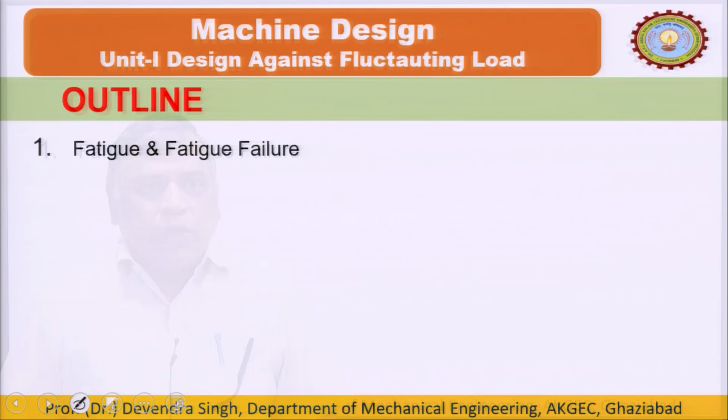I am Professor Devendra Singh, taking this course on machine design, and till now we have covered the design against static load, and this is our design against dynamic load part 2. We have discussed the various types of fluctuating stresses and fatigue failure. This lecture will include fatigue and fatigue failure, then we will discuss the S-N diagram and endurance limit, modifying factors to endurance limit, infinite life problem, finite life problem, Soderberg criteria, Goodman criteria, and so on.

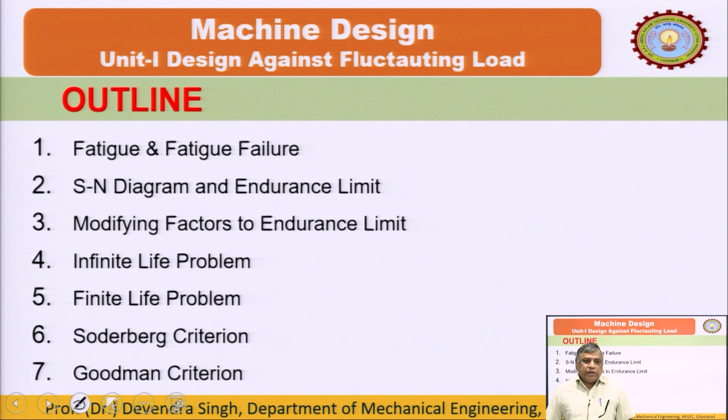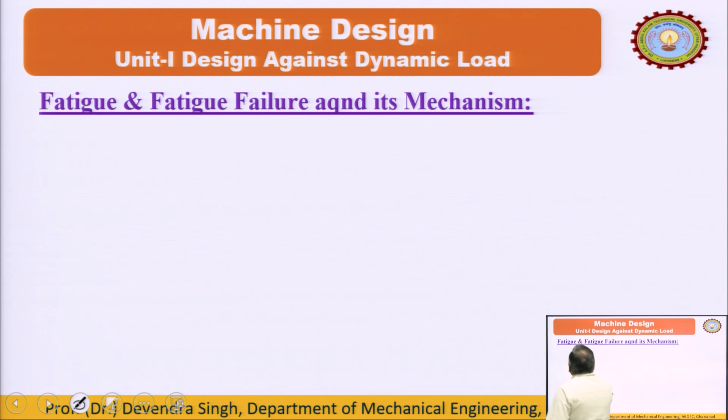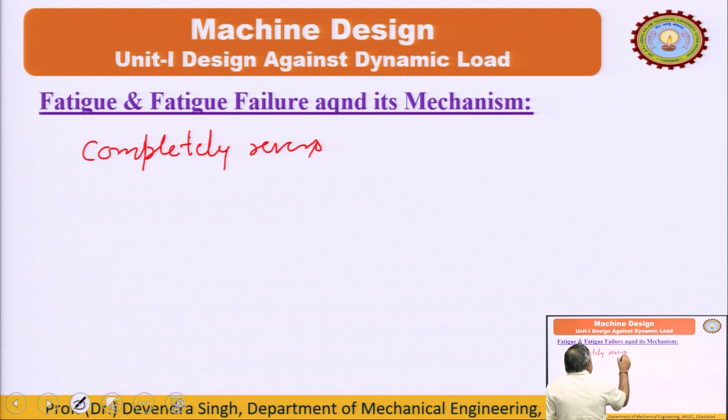So, recap our last lecture: fatigue and fatigue failure. Fatigue is the incapability of a material to take further load. If a material does not have the capacity to take further load, it is said that the material is under fatigue. And fatigue failure: if a material is subjected to fluctuating stresses, the material fails even below the ultimate tensile strength. If the material is subjected to completely reversible stresses, as we discussed in the last lecture, then in more than 90% of cases, failure takes place below the yield point. So this is fatigue failure, and it is a most critical situation in mechanical engineering, as most systems involve motion and force.

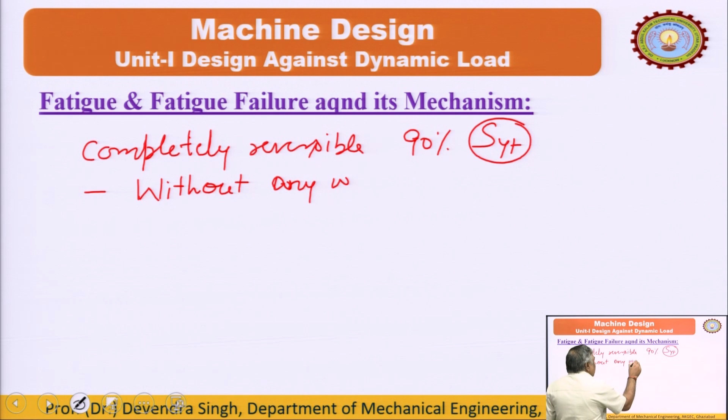So fatigue failure may take place, and the characteristic of fatigue failure is that it takes place without any warning. This makes it very dangerous. It comes without any warning, and it will result in a physical fracture. That is fatigue failure - this is the characteristic.

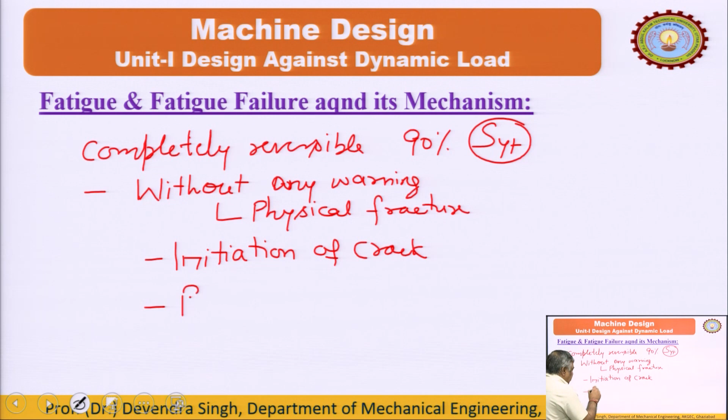As far as the mechanism is concerned, fatigue failure takes place in two steps. First is the initiation of a crack, and the second stage is the propagation of the crack.

As we all know, stress is F upon A. If area reduces, then the stress increases. So if there is any crack, the effective area which offers resistance against the externally applied load - if there is a crack, the effective area in our material that offers resistance, the value of that area will go down, while the load, which is our application requirement, will remain the same. If A goes down, then the value of this fraction, that is stress, will go up. And if this crack propagates further, this area will continuously go down and the effect will be continuously increasing in this stress, and somewhere this stress exceeds the strength of the material.

And it may take place inside the material, and this crack may be a scratch caused by machining. It may be on the surface, it may be material defects, and in discontinuities, where this crack will be considered as the initiation point, and further it will be propagated.

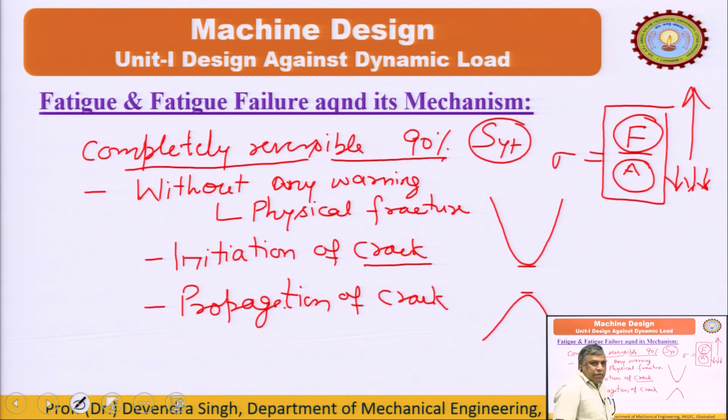A very good example I gave in the last lecture: if we bend a wire equally in two opposite directions without any equipment, without any scissor or chisel, we can break the wire into pieces. I gave this example last lecture. Completely reversible stress was applied - I turned the wire one way, then turned it the other way. So if I look at the lower-most fiber and the upper-most fiber and analyze both, in the first case the upper fiber is in compression, in the second case this inner fiber comes up and is in tension. This is completely reversible stress if the angle of bend is the same. So without any heating, without any chisel, without any equipment, you will find that after a few bends it will break into pieces. This is fatigue failure.

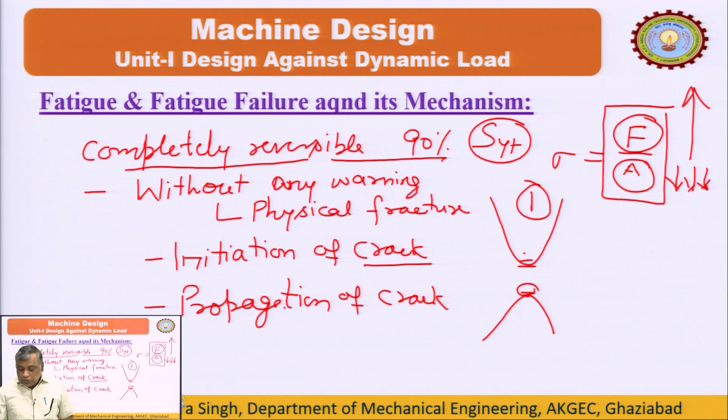So, fatigue failure is always a very dangerous state. We should consider it very seriously, and that is why we take this topic separately: design against dynamic load.

Against static load, when we design, we consider the two strengths, that is the yield point in tension and ultimate tensile strength. These are the failure stresses or the strength of the material, and if we want to include some reserve strength, then we introduce the factor of safety.

Here also factor of safety remains same, but for designing components against dynamic load, a new strength comes into the picture, and that is called the endurance limit. To determine the endurance limit, we have to plot the SN diagram, and it is a tedious, time taking and costly exercise to plot an SN diagram and determine the endurance limit.

So a designer uses the data available to get the endurance limit, or the relation that we have obtained in our literature between the endurance limit and the ultimate tensile strength of the material, because ultimate tensile strength we can determine by a single test performed on the universal testing machine.

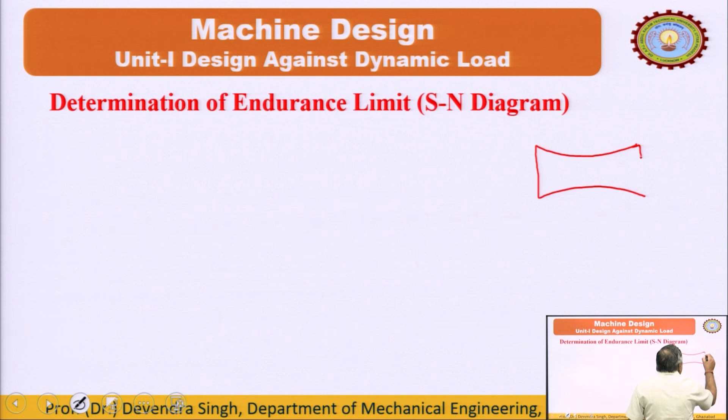This is the specimen used by R. R. Moore in his high speed bending test. It is subjected to this bending load W. The length of this specimen is 85 mm standard length, and the radius of curvature is 250 mm, and the minimum diameter is 7.5 mm, and it is mirror polished.

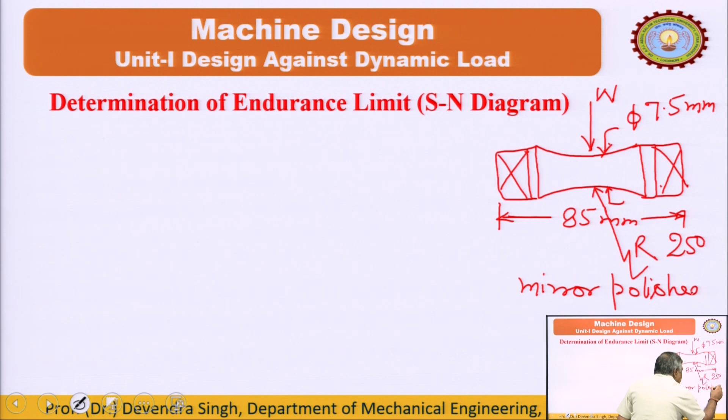Why is it mirror polished? When we discuss our modifying factors, it will be clear why it is mirror polished, and why in the longitudinal direction - that will be clear later. We use a longitudinal direction mirror polished specimen.

We rotate this with the help of a motor, with a counter, this is the rotating device. We observe here it breaks into pieces. So first step, we apply this load equal to the ultimate tensile strength, and as soon as it reaches ultimate tensile strength or more, the material will not complete a revolution, it will break into two pieces. Now we draw all the experimental data.

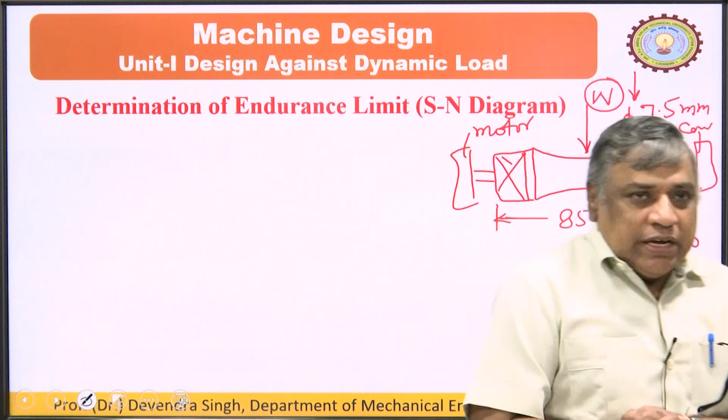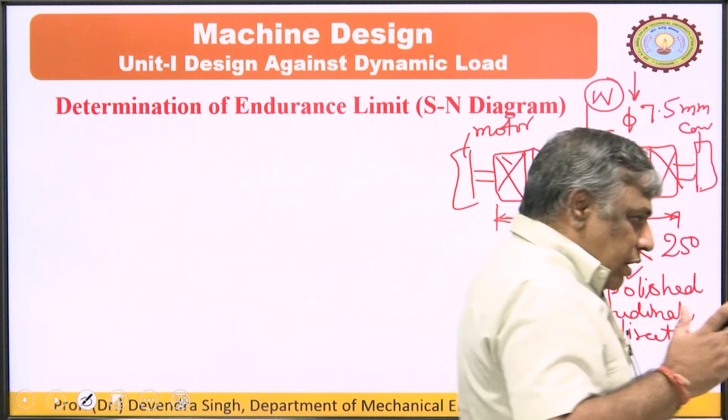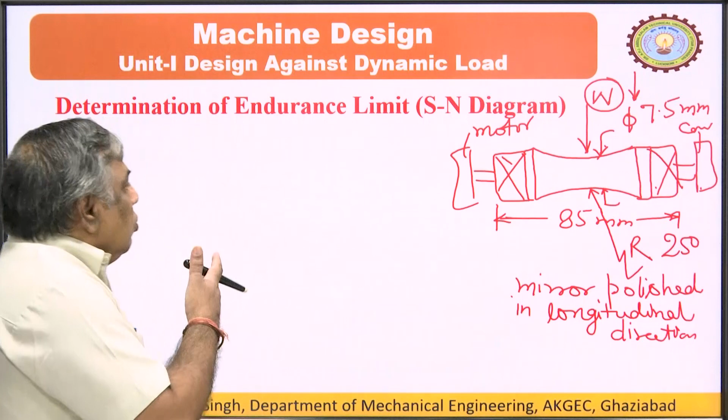Even we use the relationship between the endurance limit and the ultimate tensile strength to determine the endurance limit of any material. So now we start to discuss the SN diagram.

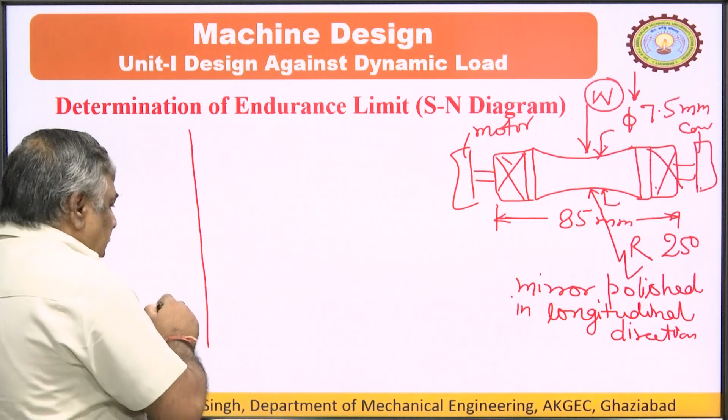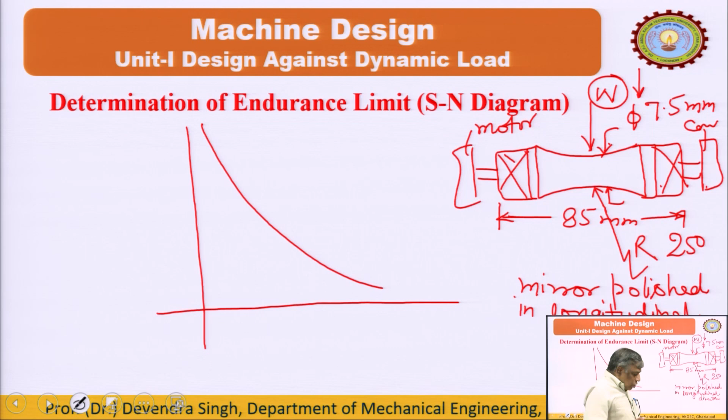In the SN diagram, if we plot the data on a simple log curve, even for ferrous materials, we do not get the knee point. It looks something like this, and this does not serve our purpose. But if we plot the same experimental points on a log-log curve, then we get a knee point, and that defines the endurance limit.

That is our requirement. So here we need to draw this on a log-log curve. On the ordinate axis we plot log SF base 10, and on the abscissa we plot log number of revolutions base 10. So this is the origin.

If W equals SUT, then ideally there is no revolution completed, and this is the point - log SUT base 10 on the ordinate. This is a failure point.

Then we further reduce W below SUT, so we get another point. We go down to 90% of the ultimate tensile strength, that is 0.9 SUT. We get a corresponding number of revolutions, 10 to the power 3. That is why on the abscissa this is 3, and there is a linear drop.

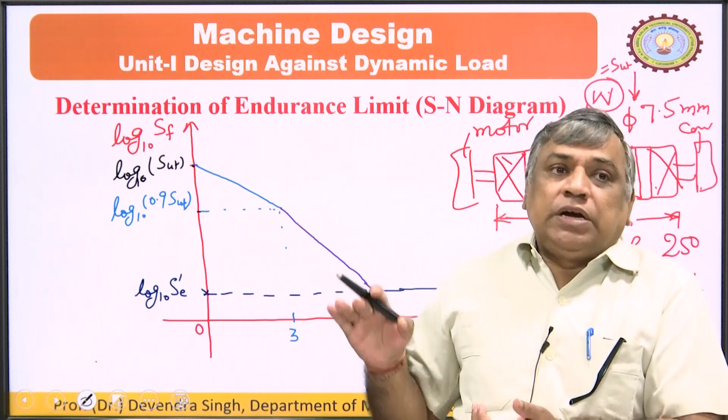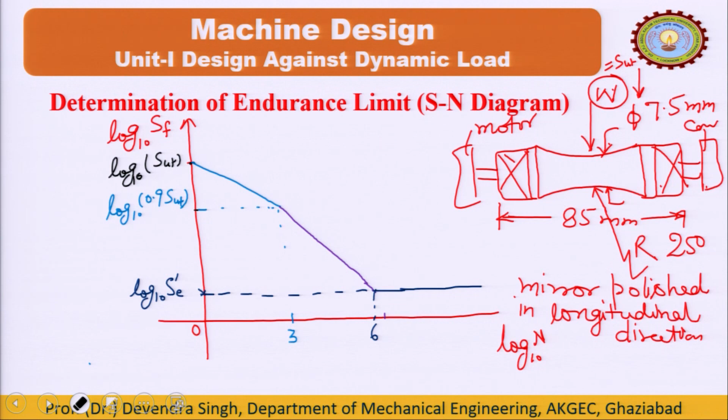The life of the component beyond 10 to power 6 is considered infinite life. Beyond 10 to power 7 we say it is infinite life, and this point we should name A, this is point B, C. If the stress level below C is induced, the survival is more than 10 to power 7 cycles, and that is called the infinite life. Point C will in fact lie between 10 to power 6 and 10 to power 7, but for our numerical purpose we consider it at 10 to power 6, that's why this is 6.

So this is the endurance limit. This is our SN diagram. So in the SN diagram I have defined this endurance limit. What is endurance limit? Endurance limit and endurance strength are the same.

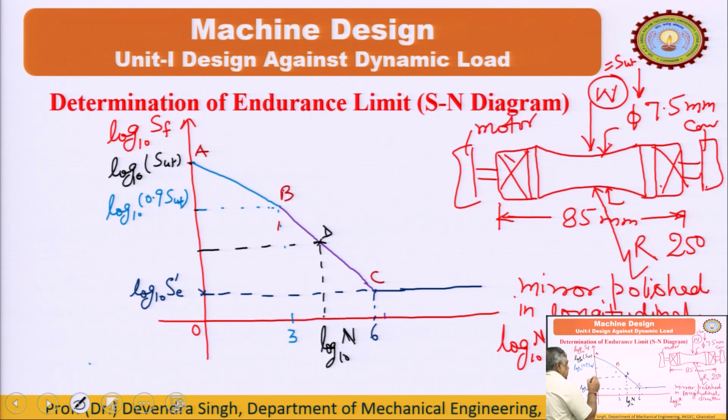One more term is the fatigue strength. Fatigue strength is defined corresponding to a finite life. If this is our number of cycles n, this is a point D, a failure point. The corresponding material strength is called fatigue strength, SF. SF, endurance limit and endurance strength.

I prefer to use endurance limit as the perfect meaning for infinite life. If the stress level is below that, it is within the endurance limit. Some authors also use endurance strength, but I define fatigue strength corresponding to some specific life of the material.

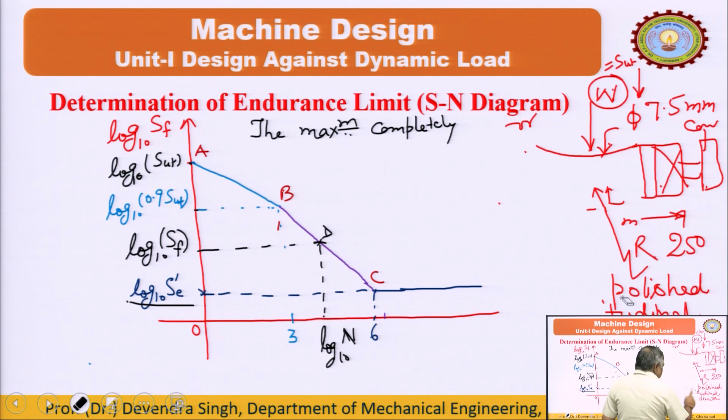...completely reversible stress that can be induced in a material for the survival of the material for more than 10 to the power 7 reversals. That is called the endurance limit. Fatigue strength is the maximum completely reversible stress that can be induced in the material for a particular number of reversals.

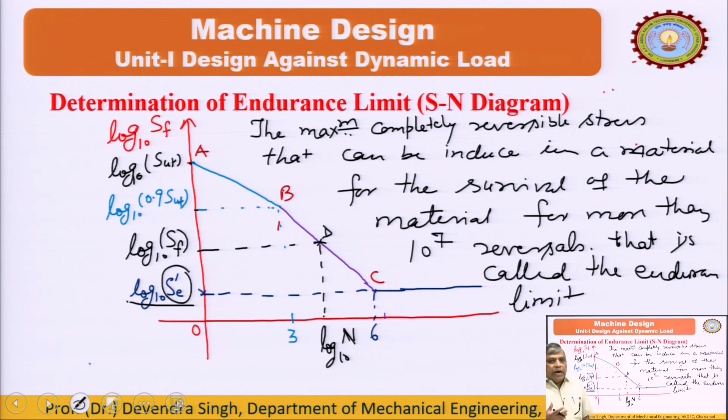Now the modifying factors, that is S prime E in the end. S prime E is the endurance limit of a specimen, determined under controlled atmosphere, which is the value obtained from lab experiments.

In real time we have to use some modified strength, because there are a number of factors which can affect the strength of the material, and the strength may get reduced. So we have to modify the endurance limit to use it in our design, to keep it safe and to handle unprecedented situations.

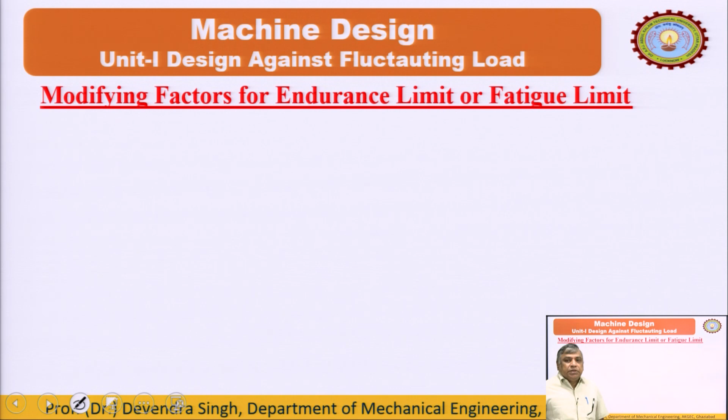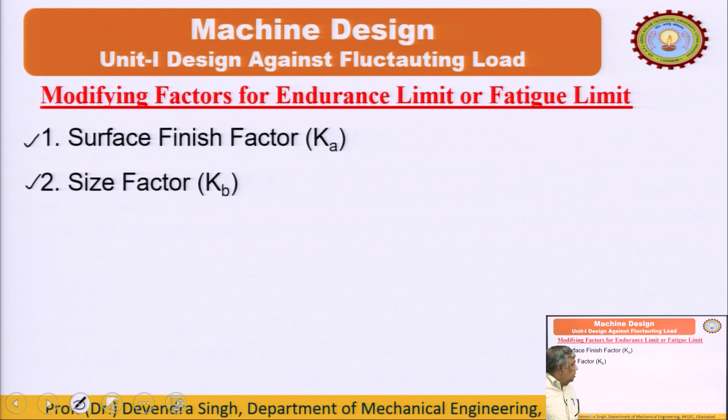There are a number of modifying factors, but for academic purposes we will discuss the surface finish factor, then the size factor, then the reliability factor, then the temperature factor, and finally the stress concentration effect and the stress concentration factor Kf. This is very important.

The surface finish factor: scratches can be treated as a crack, and if a crack is initiated due to machining, due to erroneous or low grade finishing, that may cause fatigue failure. So we consider some surface finish factor to modify our endurance strength.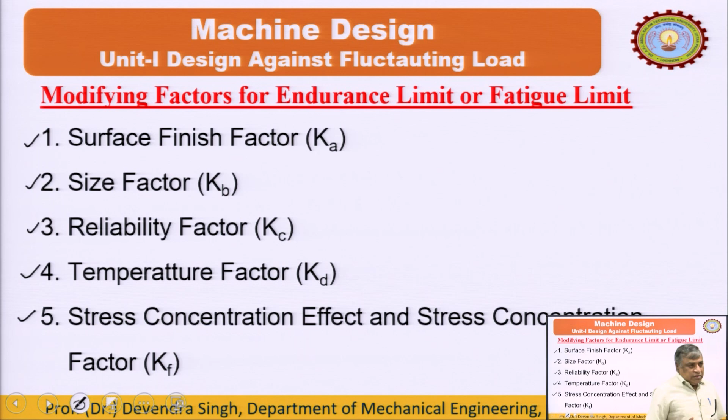Then we use the size factor. Every material has some defects, and those defects in the crystal structure may act like a crack. If the size is larger, the probability that any dislocation or imperfection initiates and propagates like a crack increases, so the chances of failure increase. To compensate for this effect and avoid failure due to dimension, we use the size factor to modify the endurance limit.

Then the reliability factor: everybody likes to purchase equipment expecting it to complete its life cycle, a desirable life, with desirable effectiveness and efficiency — that is called reliability. If we want better reliability, we have to modify the strength. So depending on the reliability desired for a particular component, we use some factors to modify the endurance limit in our design.

Then the temperature factor: we are aware of thermal effects on strength, so we use this temperature factor to account for or counter thermal effects.

Finally, there are many applications in mechanical engineering where components need abrupt changes in cross section, or holes for assembly purposes. Where the area changes abruptly at a particular section, that invites a high level of stresses — this is called the stress concentration effect. To incorporate this in our design against dynamic load, the stress concentration factor will be included.